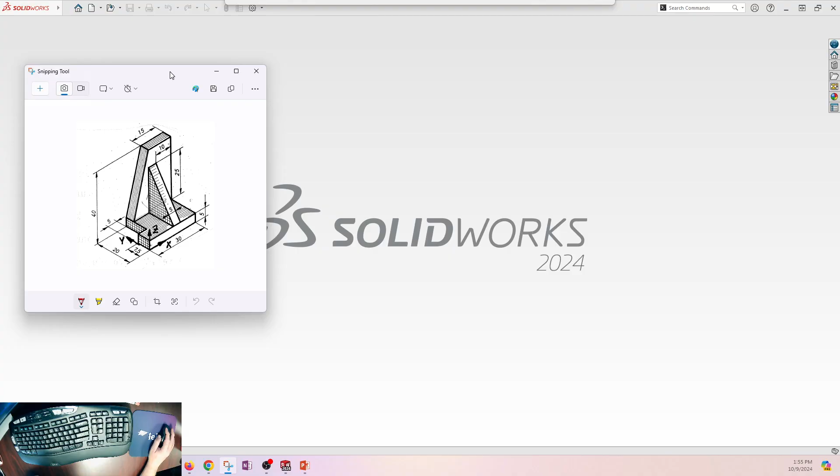Again, several ways of tackling it. I think we'll go with plan B, if that's okay with everybody. I'm gonna shift this guy over to my other screen so I can use my SolidWorks screen. Give me just a sec here. So if I slide that over and we start a new part.

All right, and we noticed that this was a metric part. So I'm going to change my units from IPS to MMGS.

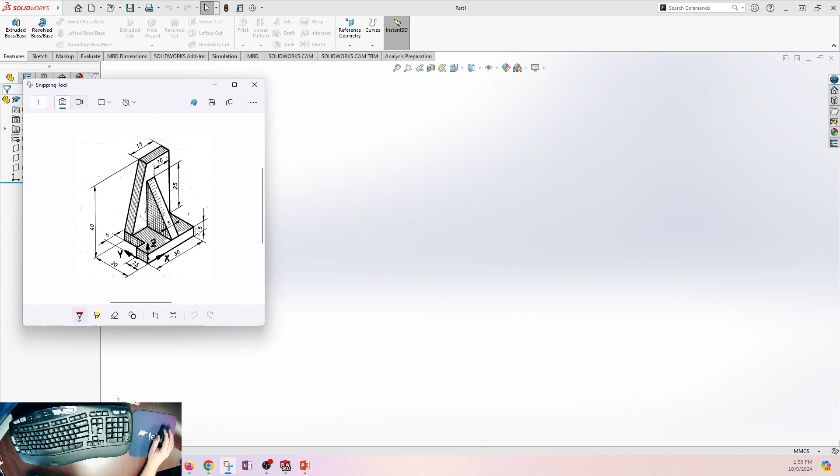Again, looking at this, I think I'll just start on the top plane and create this base plate shape. If you really like breaking it down into features, you could even create just a simple rectangle and then put that other cut in as an actual cut.

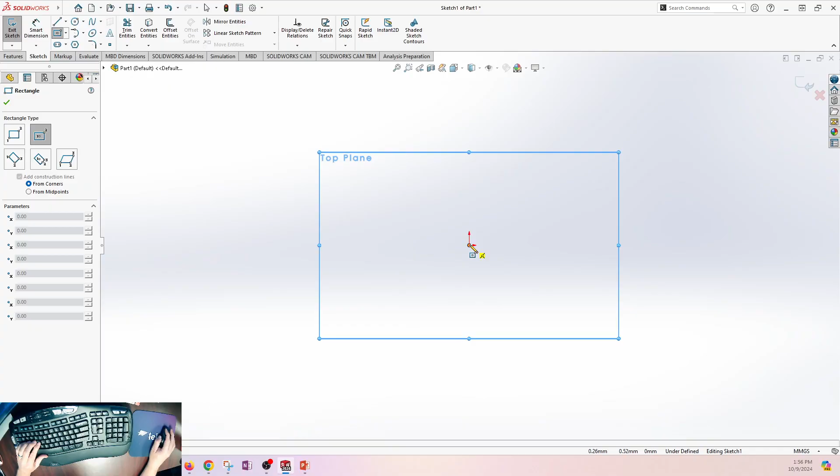That'll be just fine. Now that one is drawn hand sketch-ish, and has the coordinate system in the corner. Don't think that's necessary. We really like our centered rectangles in SolidWorks, so we'll just go with that.

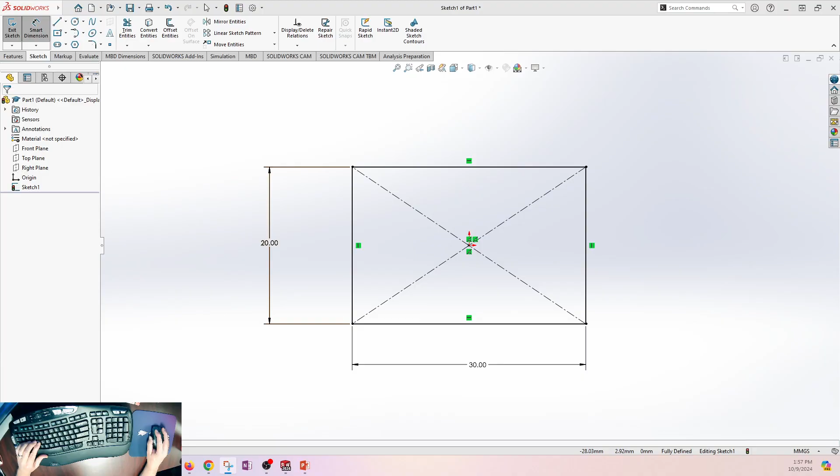All right, so looking at the outside dimensions, I see 30, I see 20, and I see 5 thick. So 30 by 20, and I extrude that 5 millimeters thick. Blind, no reason for a mid-plane there. I click done. Okay, next I'll want to go ahead and finish up this base.

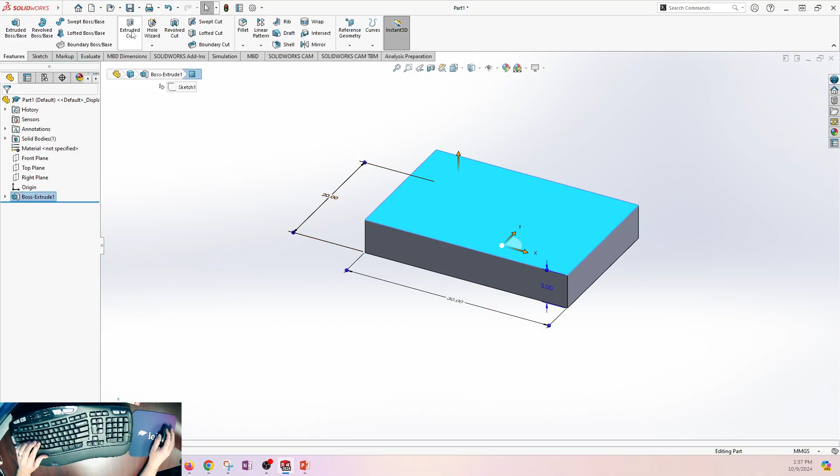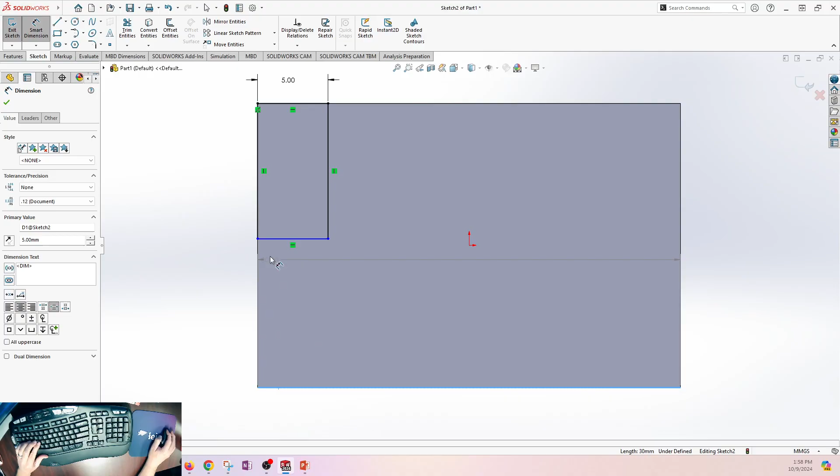So I'm going to put that extruded cut on that back corner. Looks like it is 5 wide and 7.5 millimeters off the front edge. So we'll do a corner style, making it 5 wide. And from the front edge, no reason for us to have to do any special math, everything's given, 7.5 millimeters from the front edge.

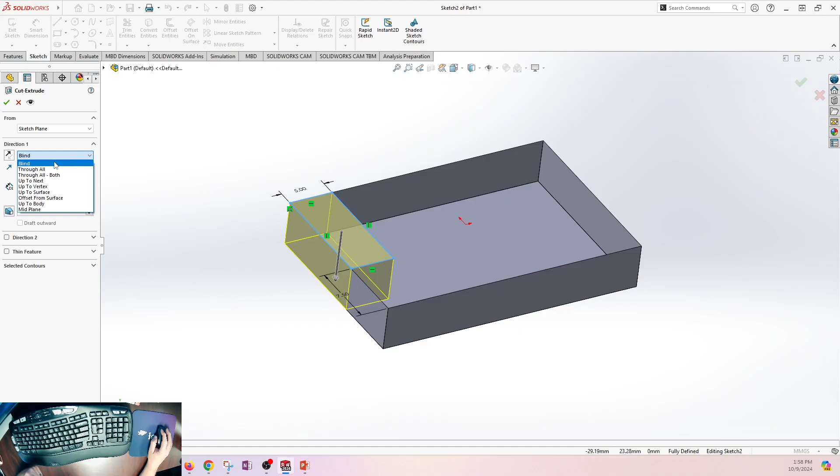And we are going to cut, even though blind would do the job, our design intent is that we'd like that corner to be cut off. So we're going to say through all, just so no matter what we do with the thickness, it'll always be there, cut off completely. Okay, so there is our base.

Next, we will add this upright plate to the back side. Now we could draw right here on the top surface and extrude a rectangle up and then cut this off, or maybe even just put a very long chamfer there. Or we can click on the back side, back behind here, and we can draw the profile and extrude that. Again, there's always multiple ways of doing it.

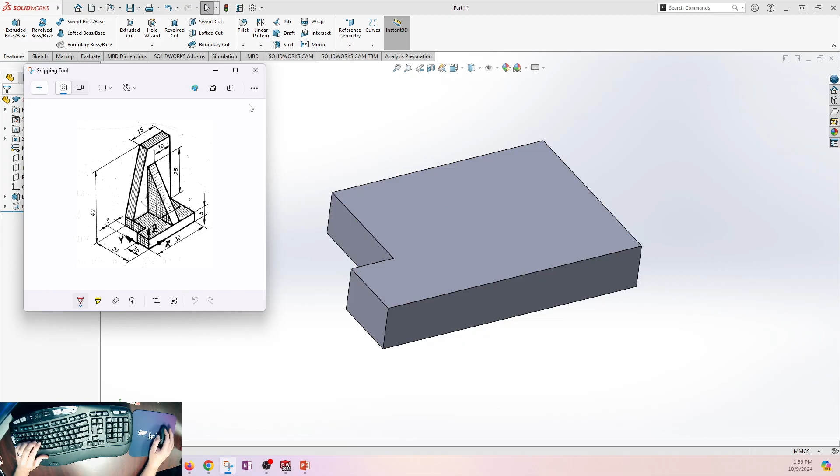So if we want to stick to this extremely simple sketch idea that we were already working with here, maybe I'll go with plan A this time and just extrude that plate. So if I click on this surface and say, look, I want to extrude a corner rectangle back here, breaking this down into lots of features, and looks like they're pretty consistently staying with 5 millimeters thick.

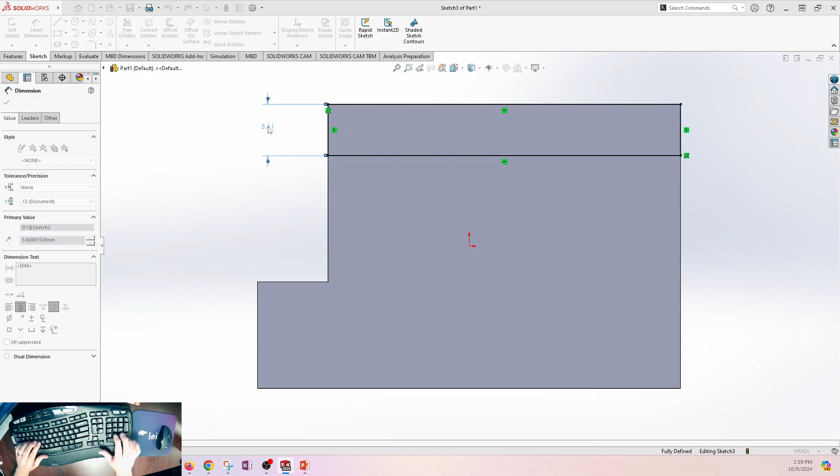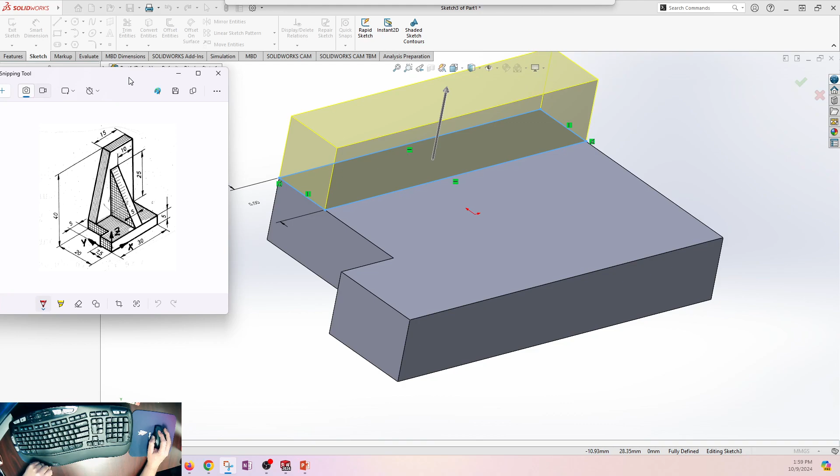So I'll just stick with that. And okay. And it does say, because it's talking to me, right? It says that it was 40 millimeters from the bottom. Okay. So if that's the design intent, we can use a tool, or we can just do some simple math and just say that's 35 tall. Let's stick to simple this time. 35 millimeters tall.

All right. Could get a better mouse, couldn't I?

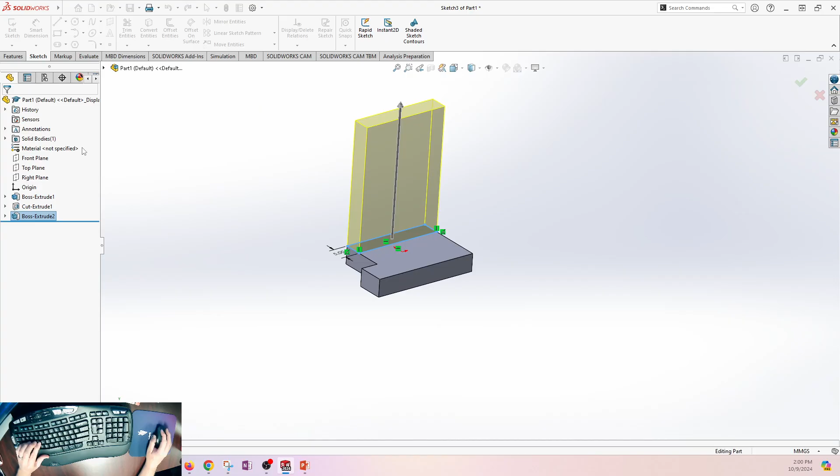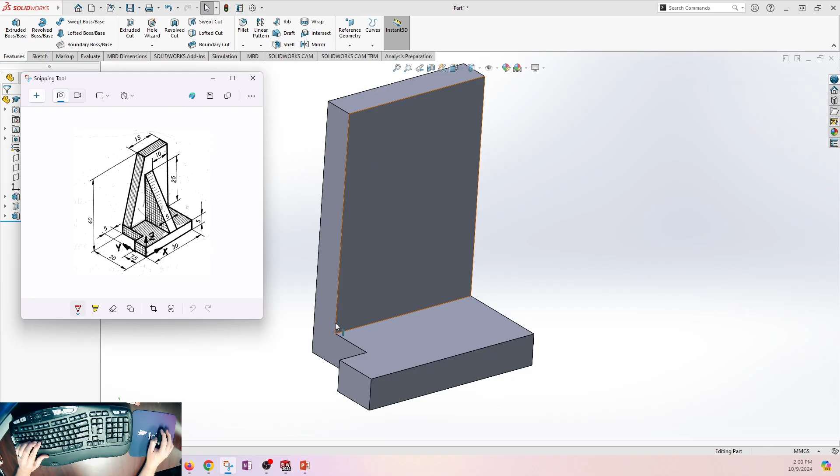All right, so 35 millimeters tall. And let's see, the way they've given us the dimensions here, it didn't really give us the chamfer dimension. It gave us the dimension off that side. So we might just do a cut. So to get rid of this edge, or make that cut, we'll click on this surface and draw the diagonal. All right, so clicking the surface, extruded cut.

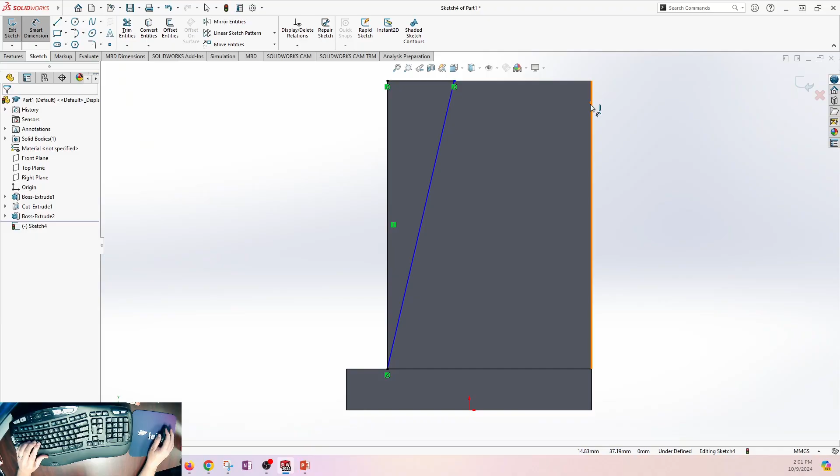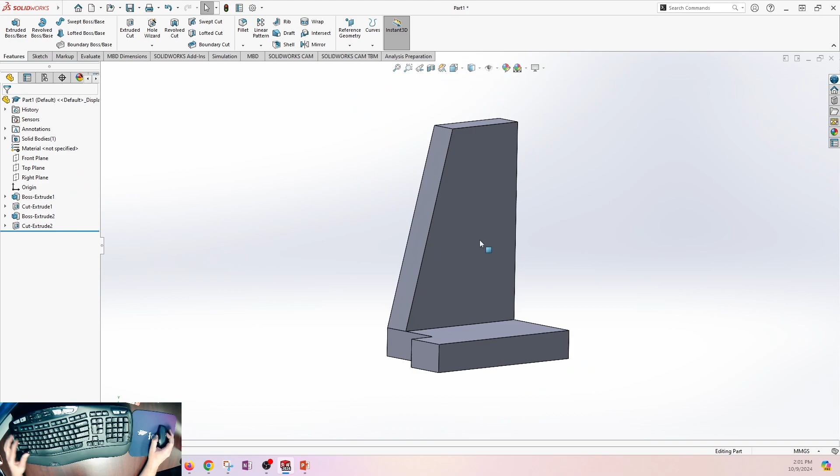We will start on the corner, avoiding the midpoint because I don't want it to lock in on that coincident on the midpoint. I do want this corner, and closing my sketch. All right, and then from this edge over here, they're saying they want 15 millimeters. Okay. All right, so complete that sketch. It rotates it again, through all. That's just fine. Okay. So now if I can compare.

All right. Last thing is this gusset. Gusset is a mechanical term, right? This gusset, is it centered? No, it is not centered. Okay. So it is 10 millimeters off of that face over there. Now we can create a gusset, and usually when we create a plane to create a gusset, we usually center it. This time, because of the way they've given us the dimensions, we're not going to. But we do need a plane out here that satisfies this need.

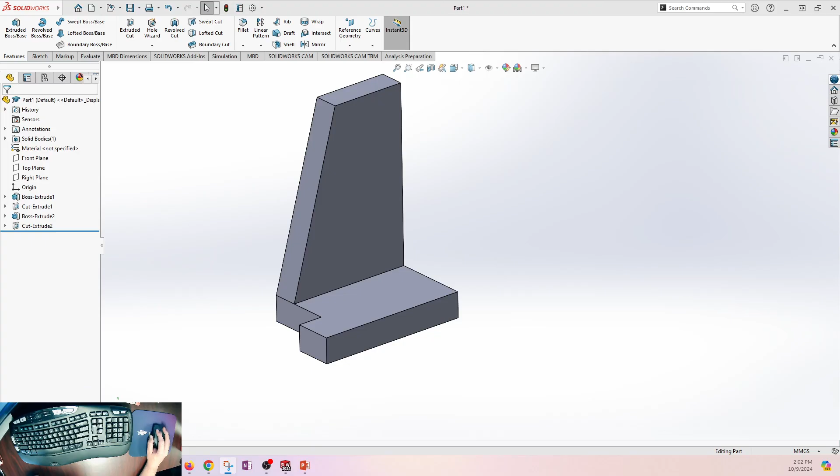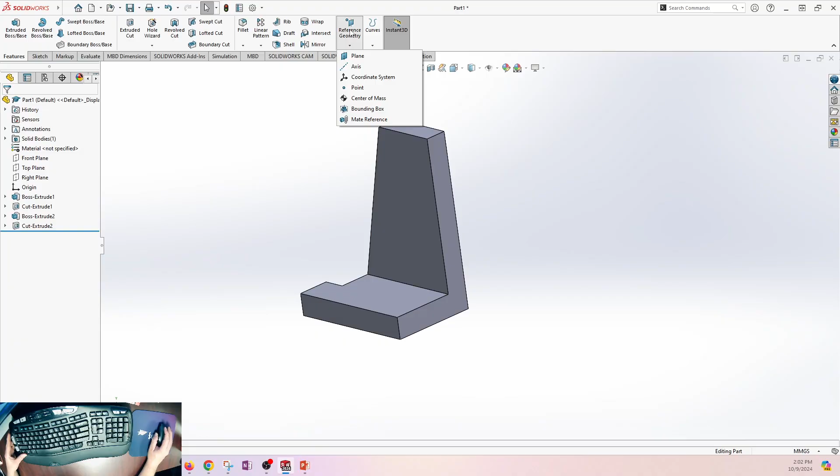Or, let's see, how did we make this? We centered our first boss extrude, didn't we? So looky there. Is that gonna work? Well, you know what? Let's keep it simple and we'll make our own plane. That way it doesn't matter if you started with a mid plane or a centered rectangle or not. It'll still work. So let's just create ourselves a plane based off of that surface 10 millimeters over, but we need it over here. So let's flip the offset. Okay, so 10 millimeters in, there's our plane.

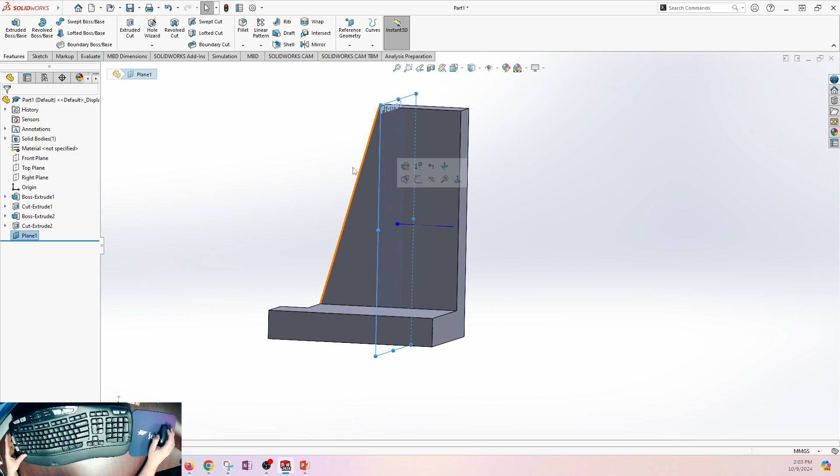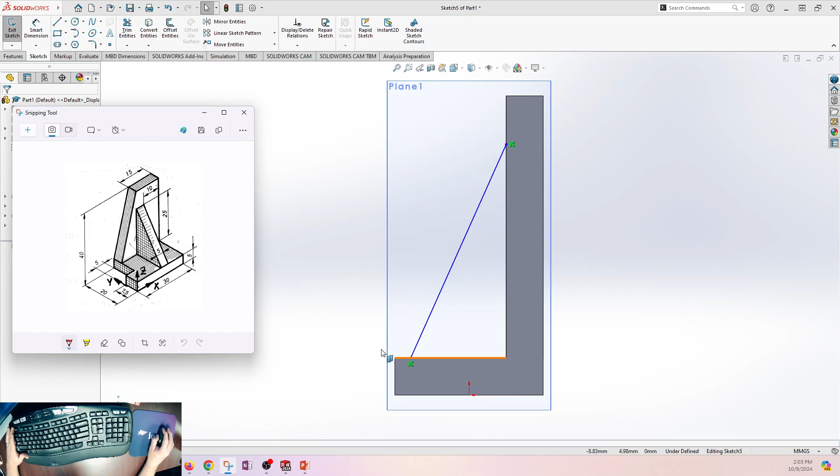Now we're going to create a rib on that plane by selecting the plane and selecting the rib tool. Now, nice thing about a rib tool is the only thing you need to define is a single line. It must start on the inside edges. Okay, so inside edge to inside edge. Now going back and looking here, it goes all the way out to the front edge. All right, so I'll move this point, and it goes 25 millimeters high. So we'll bring that out to the front edge, and we will smart dimension. Let's see if this was right. Yes, 25 millimeters up.

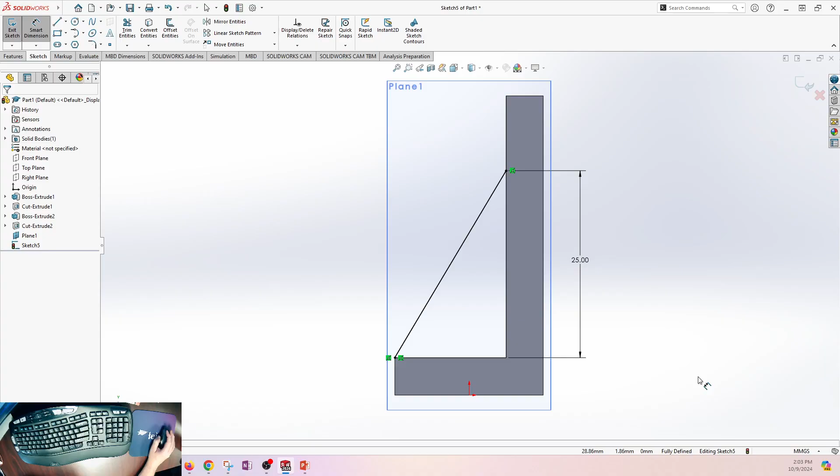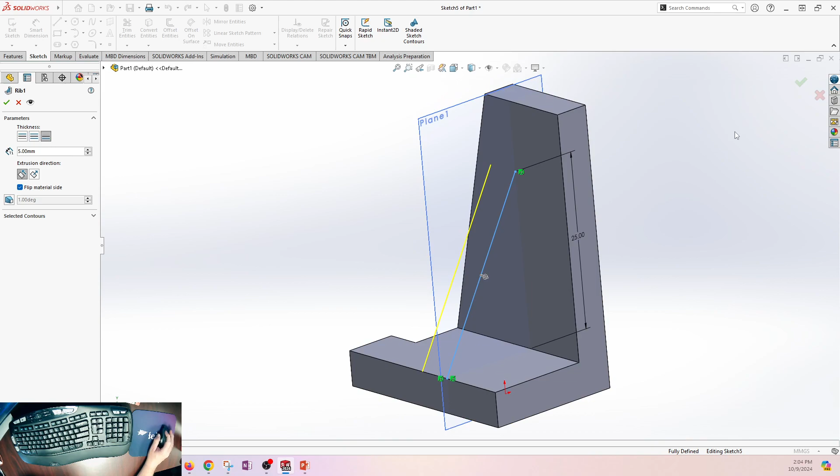Single defined line. Hopefully you've noticed as we've gone along, I have fully defined every sketch. Single defined line, and we click OK. For a rib, remember this needs to point towards the material so it can fill in. We want it to be 5 millimeters wide, and if you remember, that dimension was to the side of the rib. So we need to put all our material beyond the plane because we put our plane in at 10 millimeters. So, okay, my first guess was correct. So there it is. Let's see if it embarrasses me. No, okay, great. We're done with the plane, so it's a good idea that once you're done using a plane, just go ahead and hide it.

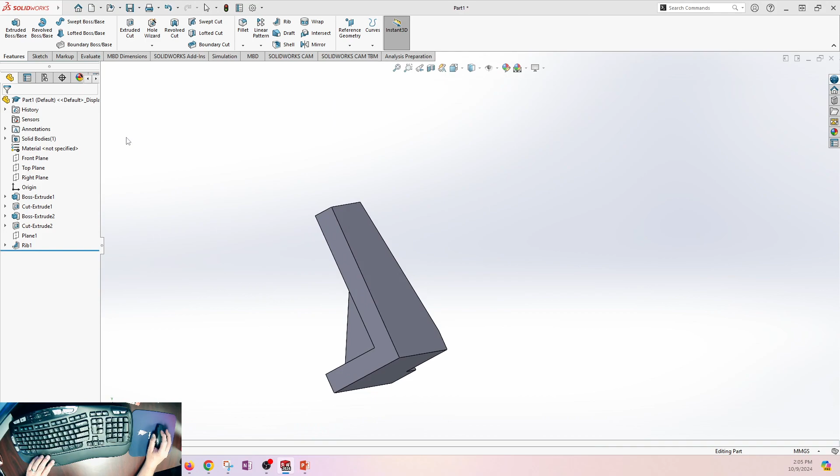All right, and let's see what isometric looks like for us. So if I hit my space bar, I click isometric. Well, that's the opposite of this isometric, but we can make it look the same. Oh, I am embarrassing myself. You like that? How about something like, let's give a front view again. That looks about right. That's just some arrow keys, and that looks pretty good.

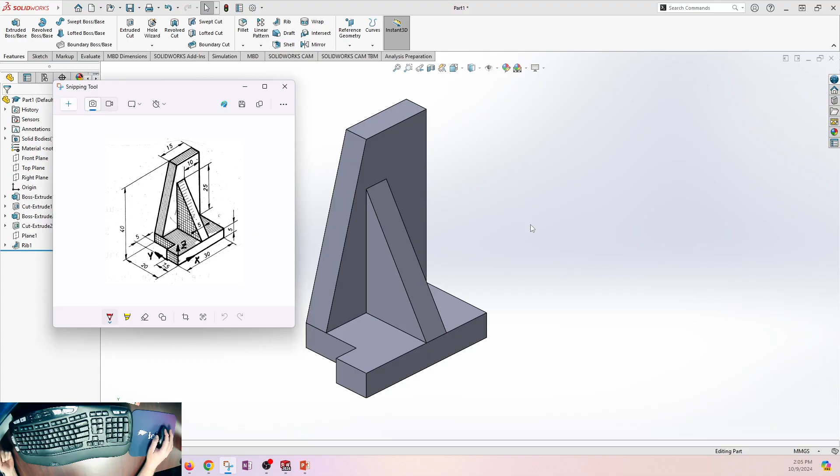Okay, so summarizing this part, we looked at this and we said we had a couple options. We could have done an L shape, extrude, and then cut away, or we could have extruded our base, then our upright or back plate, and of course cutting away this cut, and rib. So this is a very basic part. We were able to make that fairly quickly. We'll talk about some more parts, some more combinations of features as we move forward. But hopefully that helps you a little bit today.